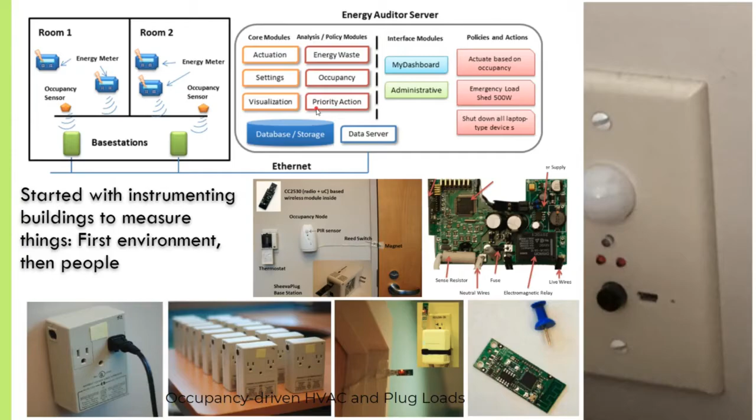We also created remotely controllable plugs that reported energy usage through wireless interfaces. They could also be shut down, they could also be throttled, and so on. And then we connected to a building management system where we could monitor the energy usage. And we started looking at interesting data.

Energy consumption. Over the years, a whole community of researchers came up in building systems. In fact, it's called ACM BuildSys. It is now in, I don't know, its 6th or 7th cycle, where the researchers who work on commercial buildings and city-scale infrastructures get together and talk about this intersection of physical systems infrastructure with the computing folks, which is what ACM is about. And that is one example of cyber physical systems.

So that was all great. But what was the problem? The problem was that all that we did worked well for one building. And when you went from one building to the other, you had to do the same thing all over again. It's like you build a computer of one kind and you have to write its code, its assembly, compiler, its operating system as you go from one computer to the other. I'm not even talking about one computer type to another computer type. So the biggest problem was that, this is the computer science building I was telling you about, all that we did was not applicable and we had to keep repeating it for every building.

So we ask a very simple question. Can we program these physical buildings, physical spaces, which of course depend upon their systems, not only the state of the building with respect to temperature and air conditions, but also occupancy? And in fact, what are humans doing? Are they meeting in a conference room? Are they in their offices? Is there a new event happening? Is there an open space event happening? So now you needed to somehow find a way of programming, or at least create a platform. The rest of my talk is just about this one single goal, which is how do you create a platform out of buildings.

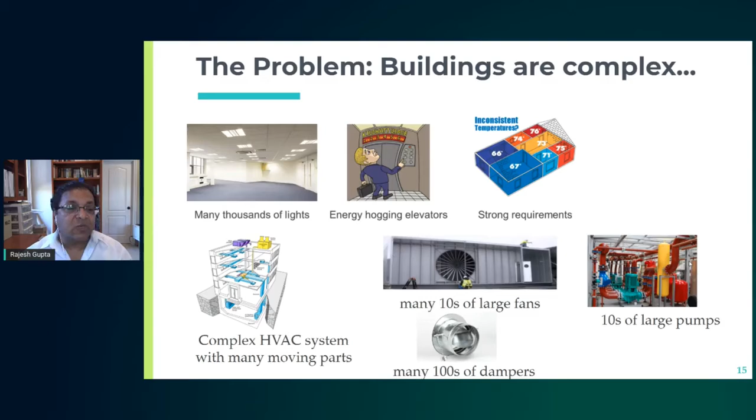Computer scientists are good at creating abstractions that can build upon each other, which is why we can build complex computing systems, mainly because of the abstraction levels we have created. So we ask ourselves the same question. Can we create similar abstractions for not only the building structures here, but also the information flows that are happening?

Now, information flow had an even bigger level of complexity, where you had thousands of sensors providing a data deluge, but you don't have that much attention. You have to somehow find a way to compress this so that you can get the attention of the operator or the occupant of the building, and then whatever they give you as feedback must be amplified into a whole bunch of instructions for multiple subsystems. So this problem is not just common to buildings, but to complex systems. In fact, this was referred to as wealth of data and poverty of attention by Herbert Simon a long time ago in talking about the institutional impact of computing technologies.

So you have customers or users, and you have a cyber physical system in between that is interfacing with a physical system. Often people use the phrase digital twin or plane. So you have a physical system and you have a virtual system that is somehow causally connected to it.

All right, so can we get an abstraction in place? And here's what we did. So we said, okay, here's one way to think about it. At the lowest level, you have sensors and actuators: temperature sensors, carbon dioxide sensors, switches, control parameters, PIRs, whatever you want to put there, CO2 and maybe particle monitors and so on.

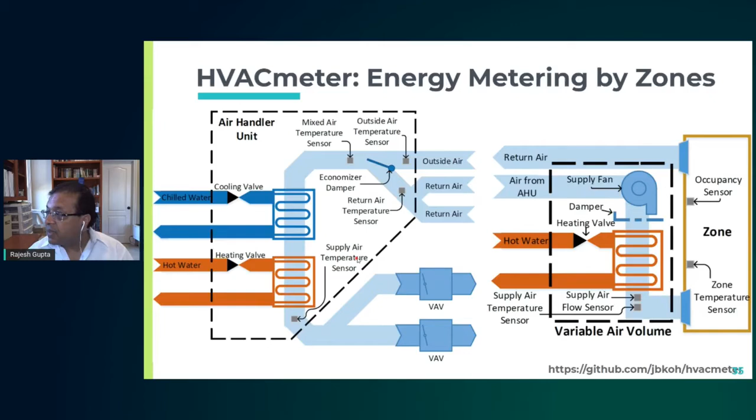So you can then write up the equations that measure the temperature, measure the airflow, and then based on that compute how much energy is being extracted or inserted into a given zone, and then you add them up as a total energy usage. And the energy usage could be because of the change in water temperature versus change in the air temperature.

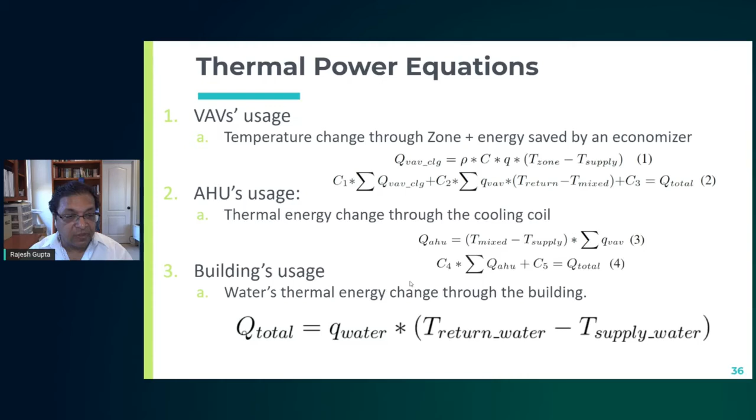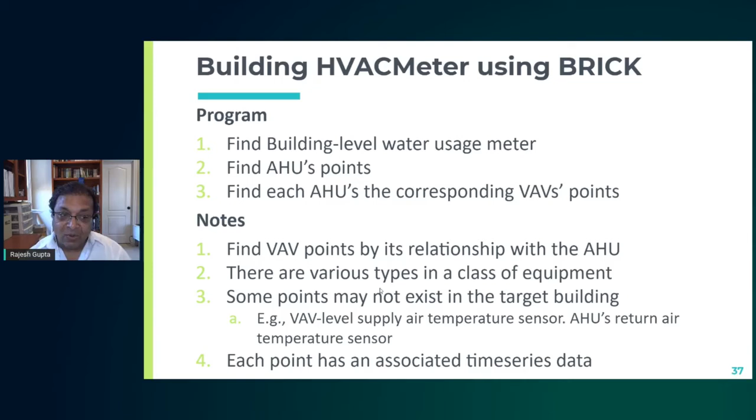So the program is nothing but finding the building level water usage, finding the AHU points, finding corresponding VAV points. Remember, you're writing a program that can go from one building to the other. So each of these needs to be discovered for other buildings as well. And so when you do that, your query could be: find all the return, supply and mixed air temperatures.

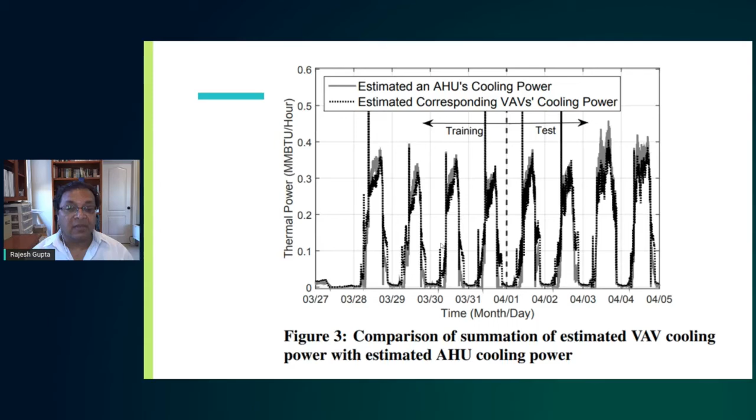But even more interesting, much more interesting, was the ability to discover that, look, the airflow is showing me this much air going in, but the VAV is giving me a different number, and it is not adding up. It is not adding up because there is a fault. There is a damper that is stuck, open or closed. So we started discovering faults in the system automatically.

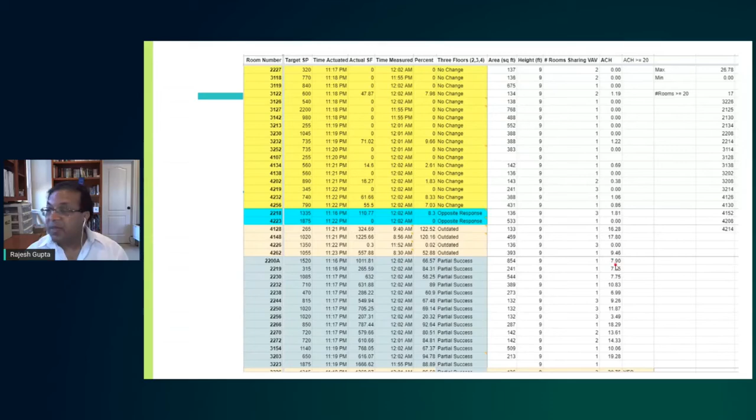And in fact, when we wrote a program, so there are something like 250 rooms in this particular building. If you were to go room by room, you have to go up the false ceiling and look to see if the damper is stuck. On the other hand, if you write a program and you set up, for example, this is the target set point, this is the CFM, for this particular room, 1520 cubic feet per minute. But when we actually set it to maximum, we only get 66% of the maximum. That means the valve is getting stuck. So we identified rooms where such valves are stuck.

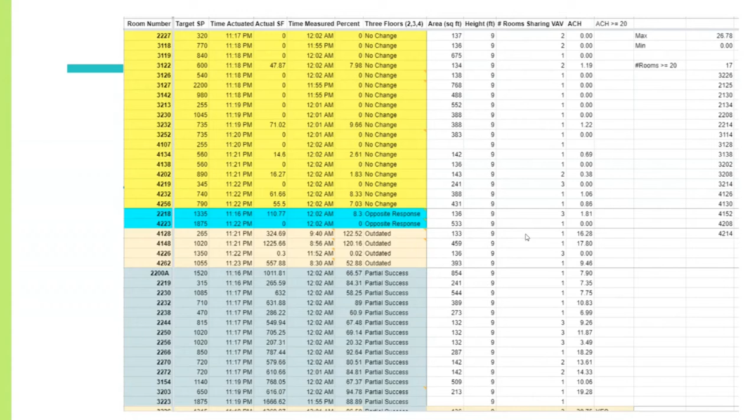Now, in those days, it was just an issue of saving energy. But in the days of COVID, you can imagine what problem this can lead to. You think you're getting fresh air, but your airflow valve is stuck, and therefore you're actually getting much more stale air, and that can lead to a super spreading event, especially if you're in a meeting room or a conference room. So we are actually fixing those up in this particular building currently. You can imagine the 237 zones, 250 rooms, and so on.

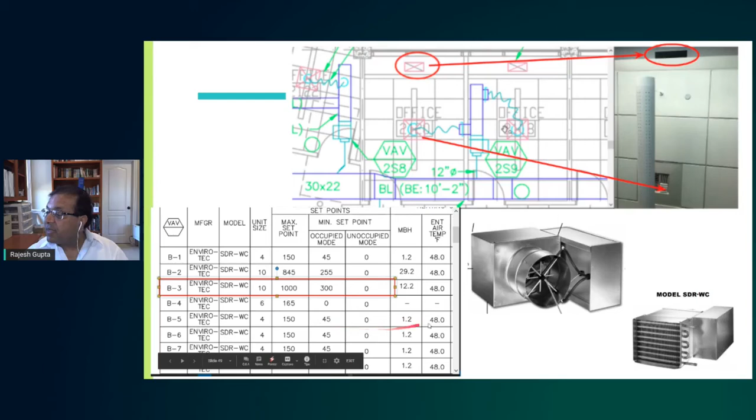This is what the VAV valve looks like. And this damper here is controlled by these gears, which are plastic gears like you see in an RC plane. So over time, they basically break down. Now, if you look at the spec sheets, this is a different room, but you can see nominal is 45 CFM, maximum 150 for this particular room.

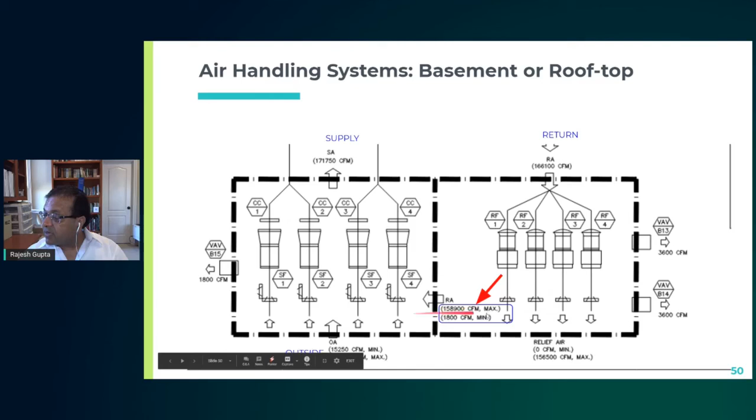So if you look at the air handling system for the entire building, you basically have big fans supplying air to the building, taking the return air, relieving that air to the outside, taking the outside air, and then there is some recirculation that happens here. So this is for the entire building. This is the schematic diagram, and this is how it looks in reality, on the roof, for example. This is a typical air handler where air enters either from outside or from the recirculation, and these are the filters, supplying through the air handling units to the various zones.

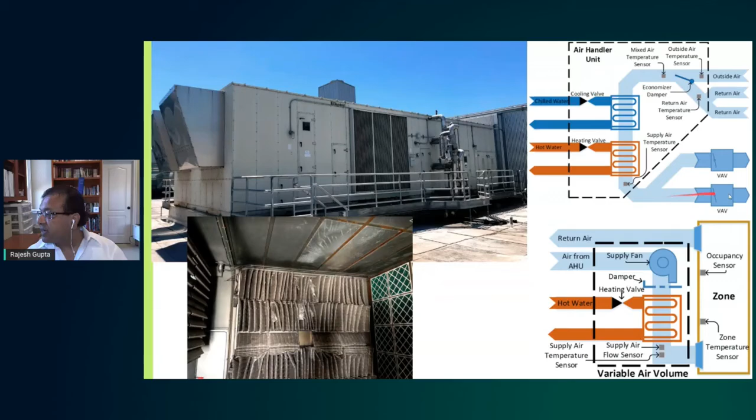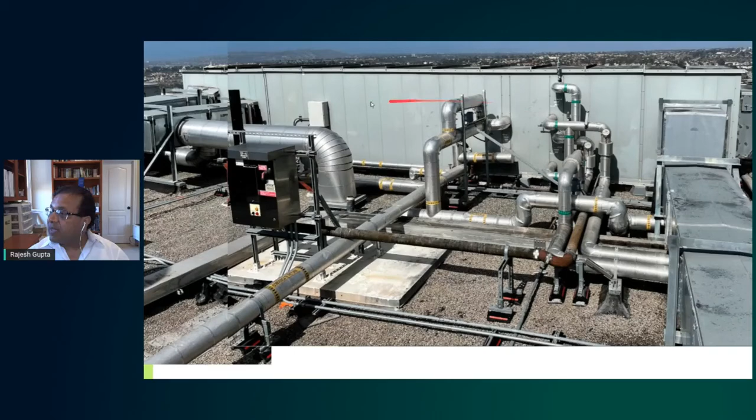This is another one. This is actually at a hospital where we have COVID patients. This is the return air here, the chilled water loop here, the hot water loop here. There are filters here, and then your supply goes in there. So you have two supply vents, one going inside the building. Now you can see the challenge you run into. Your air is coming in, and that air has to be purified in this air handling system. You can monitor it here, see how good the quality is, and of course manage it against energy consumption and so on.

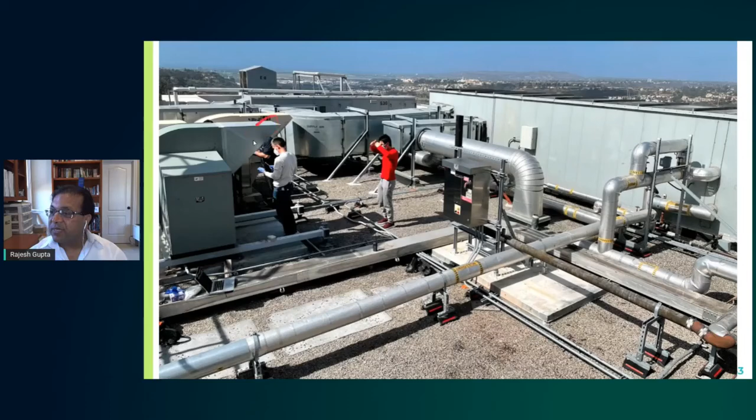This is my postdoc and students taking samples of the air for presence of the virus from the exhaust, and unfortunately we find quite a bit of virus in the exhaust. So we asked the question: can you write a program that automatically goes through the entire air handling system of the building?

But it goes more than that. It also says, well, for this period to this period, let's say every 2-hour interval, before we meet, can I increase the air handling and then bring it back down? And how much can I increase it? So it turns out that just for a classroom, we can go from 5 air changes to over 20 air changes. Now you can imagine that brings the risk down almost to less than 1%.

And so you can do zone level air control when people meet, to reduce the infection risk, and at the same time, because you're recycling it, you're also keeping energy use minimized, at an optimum.